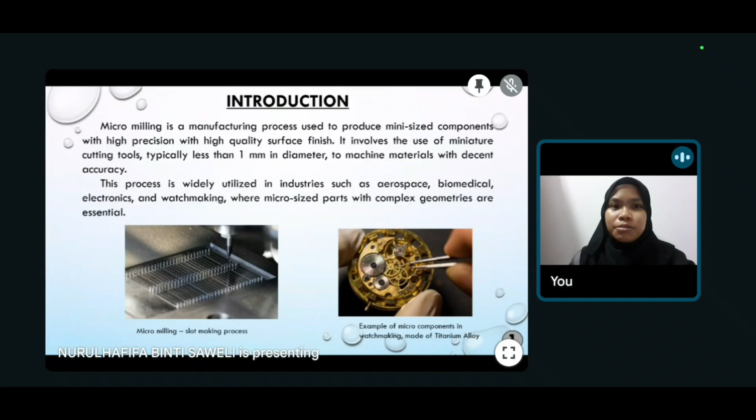The first one is the unpredictable tool life and premature tool failure are a big issues in micromilling. The second one is optimal machining strategies difficult to predict with the existence of burr formation in micromilling. The third one is micromilling cutters have different behavior compared to conventional macro tools.

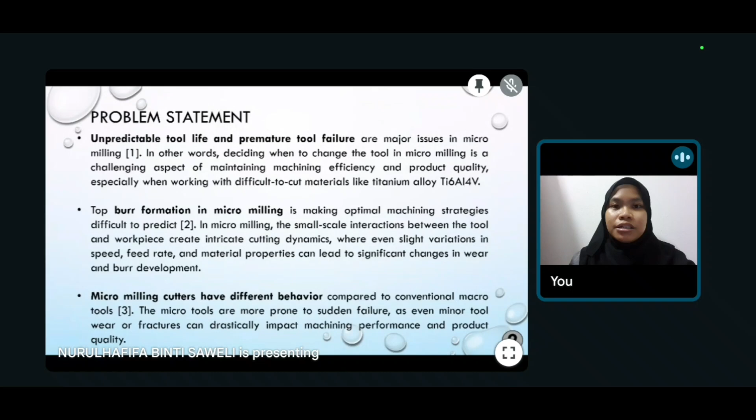Next, motivation of the project. Excessive tool wear and burr can lead to surface defects and dimensional inaccuracies. Therefore, this research is initiated to develop a prediction model based on tool wear and burr. The outcome from the developed model help to assist manufacturers in terms of scheduled tool replacement or minimizing downtime.

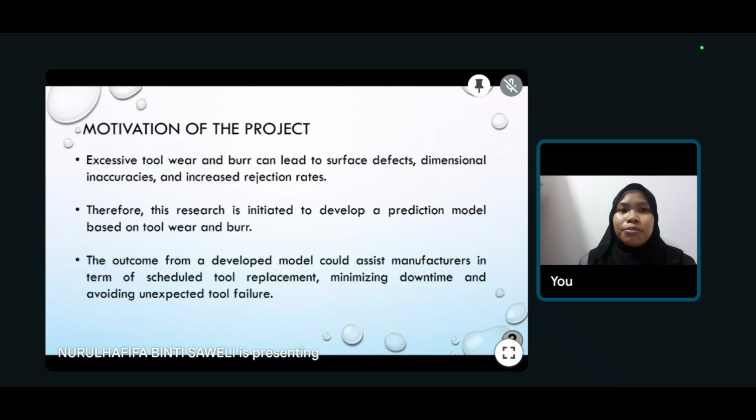The objective of this project is to investigate the tool wear state and burr formation during micromilling of titanium alloy under different cutting parameters. To develop a predictive model based on tool wear and burr response by using RSM.

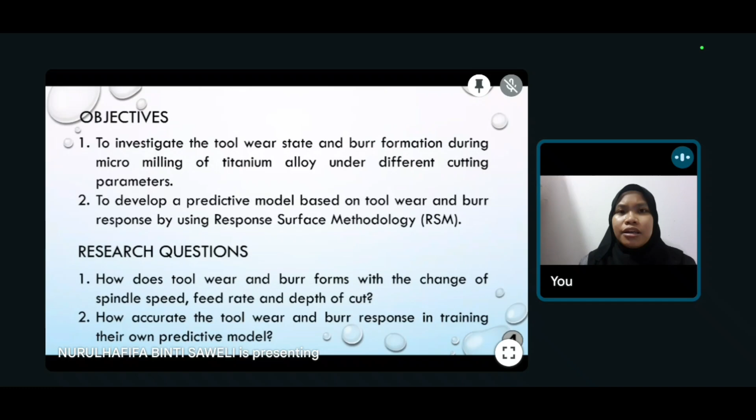After that, research question. To know how does the tool wear and burr form with the changes of spindle speed, feed rate and depth of cut. And to know how accurate the tool wear and burr response to train their own predictive model.

After several previous studies, some research gaps were found. Most of prediction models were based on single or individual signals, either for tool wear or burr formation. Since tool wear and burr are the undesired outcome, it is better to fuse the signals rather than analyzing them separately. There is still limited research on prediction of titanium alloy at a microscale level, since most of the studies found at conventional or macro scale.

There is limited research on RSM in generating predictive models based on tool wear and burr. Most of them are found to predict other responses such as surface roughness, cutting force, acoustic, and vibration.

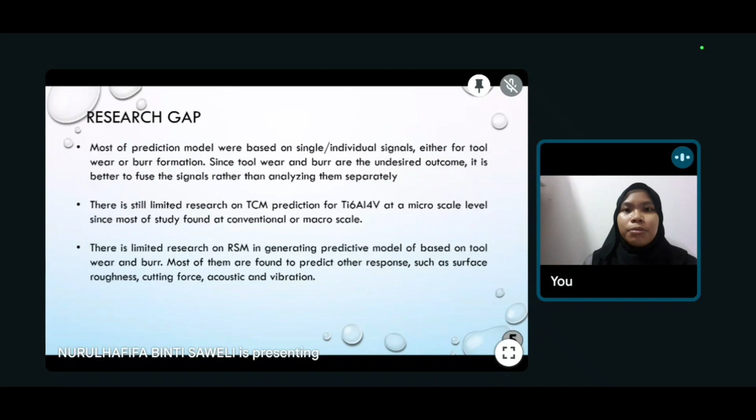For the methodology, it starts with introduction, followed by literature review. Next is design of experiment with a combination of full factorial and RSM. Next is micromilling experiment under dry condition with various spindle speed, feed rate, and depth of cut.

During the experiment, if the experiment can pass in single experiment, it will be proceeded to the next step. But if the experiment cannot pass in single experiment, it need to replace the new tool before proceeding with the next step.

After that, tool wear and burr measurement. Tool wear measurement is based on maximum flank wear, while burr measurement is based on burr width.

And then analysis and prediction model development by using ANOVA and RSM via design expert software. Lastly, the validation of the model to see the percentage accuracy of the predictive model.

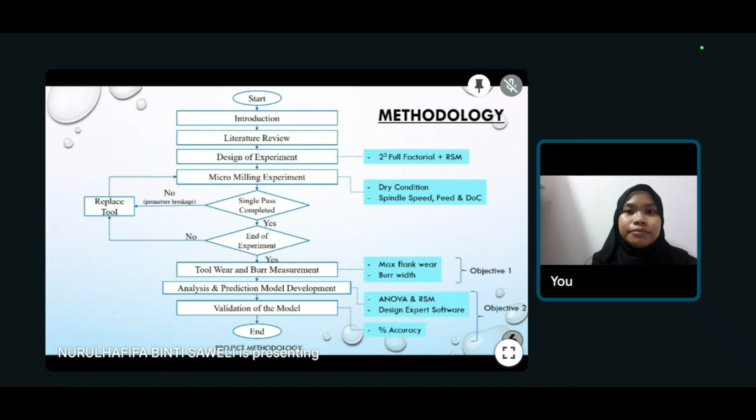The workpiece material that has been used in this experiment is titanium alloy. Cutting tool, KRIS precision with diameter of 1 mm. Machine tool of Akira Seiki 3-axis CNC machine, microscope of TM3000, scanning electron microscope SEM.

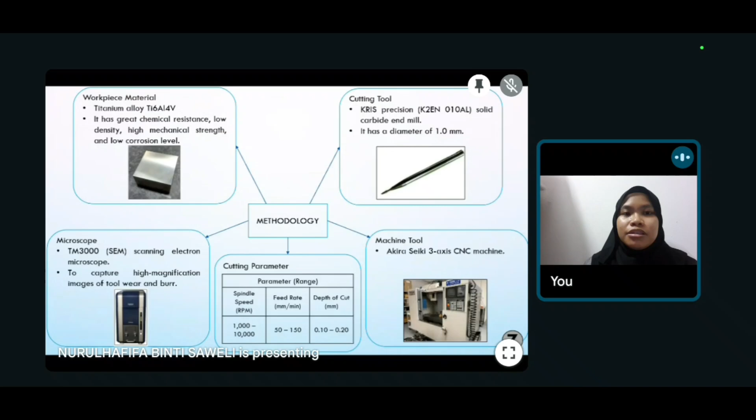The cutting parameter that has been used is in the range of 1000 to 10,000 RPM for spindle speed, 50 to 150 mm per minute for feed rate, and 0.10 to 0.20 mm for depth of cut.

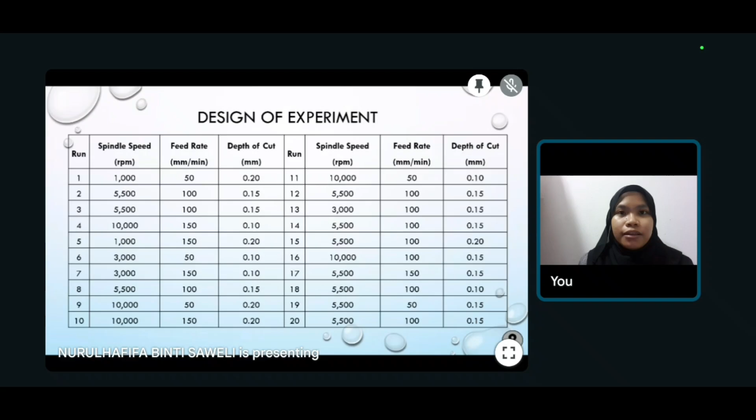For design of experiment, this table shows the result from design expert software. There are 20 experiments for this project.

Next is the result. After the 20 experiments, it is found that the least burr width is 0.092 with spindle speed of 3000 RPM, feed rate of 50 mm per minute, depth of cut of 0.10 mm.

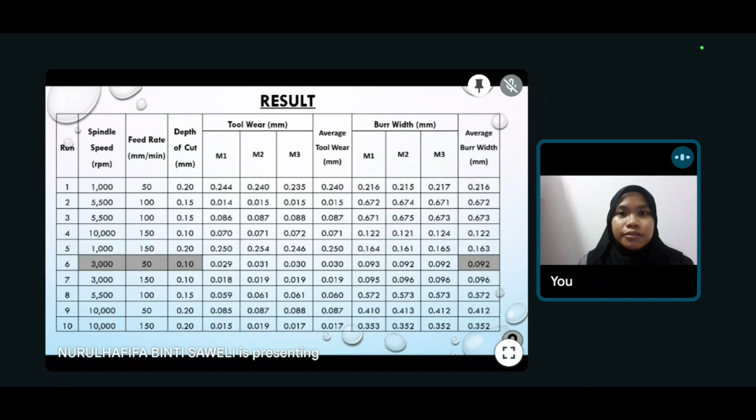Meanwhile, for tool wear, the minimum tool wear is 0.013 with spindle speed of 5500 RPM, feed rate of 100 mm per minute, and depth of cut of 0.20 mm.

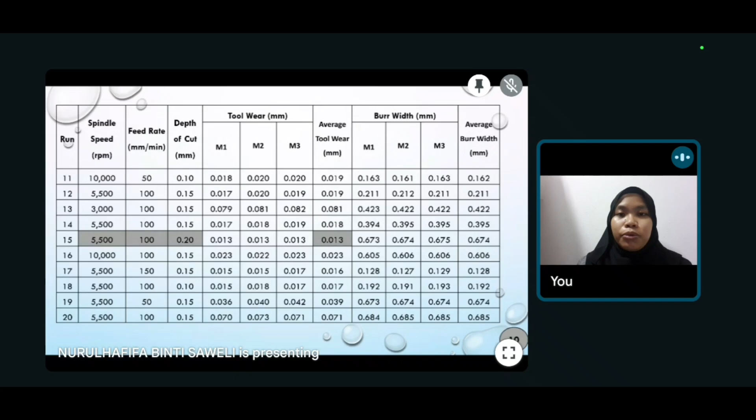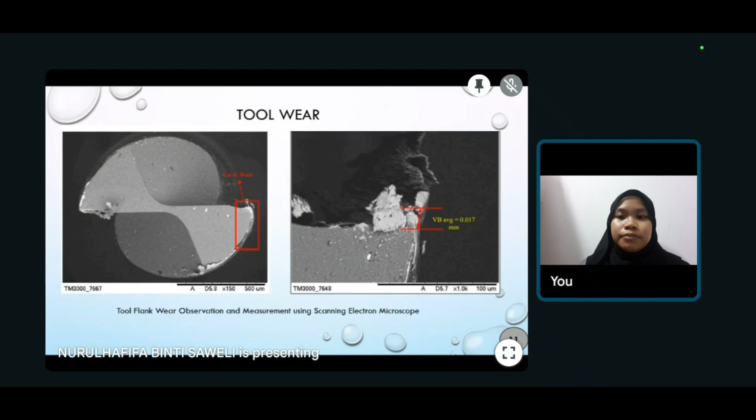This picture shows tool flank wear observation and measurement using scanning electron microscope. This is tool wear contour plot, the smallest predicted tool wear at constant feed rate of 0.0287 mm.

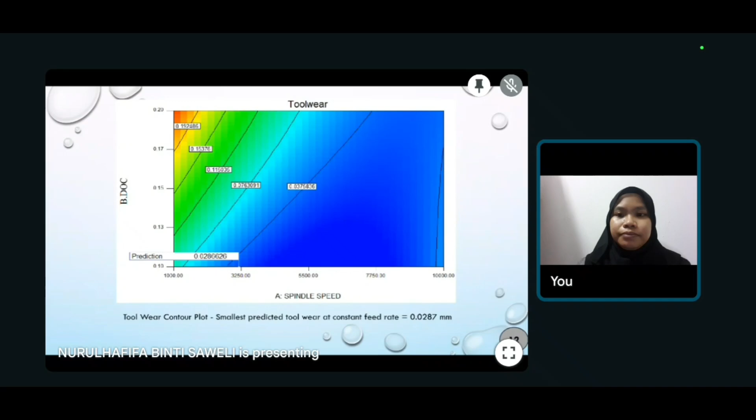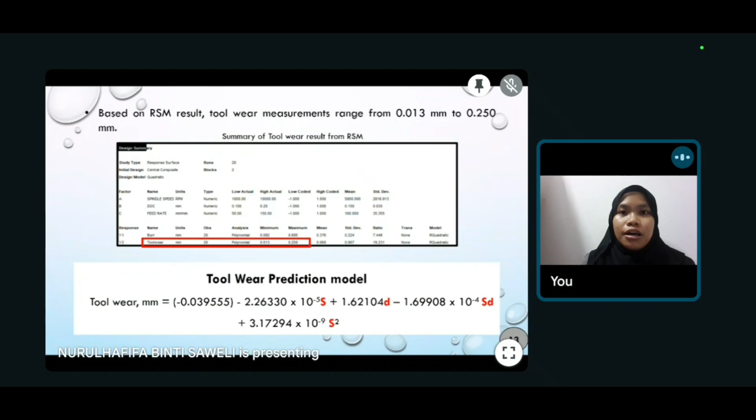Based on RSM results, tool wear measurement range from 0.013 mm to 0.250 mm. This is the tool wear prediction model after using the design expert software.

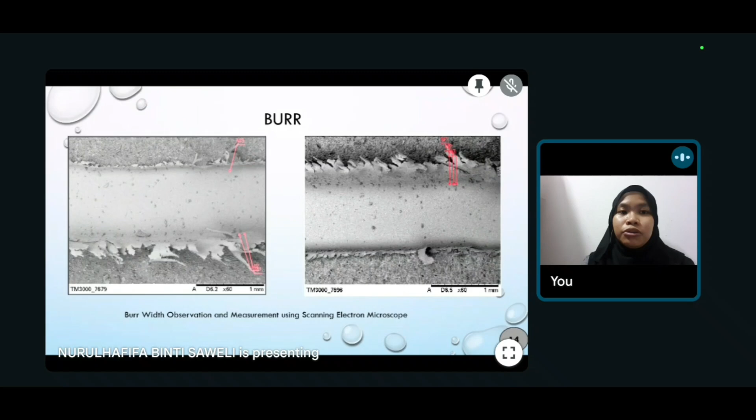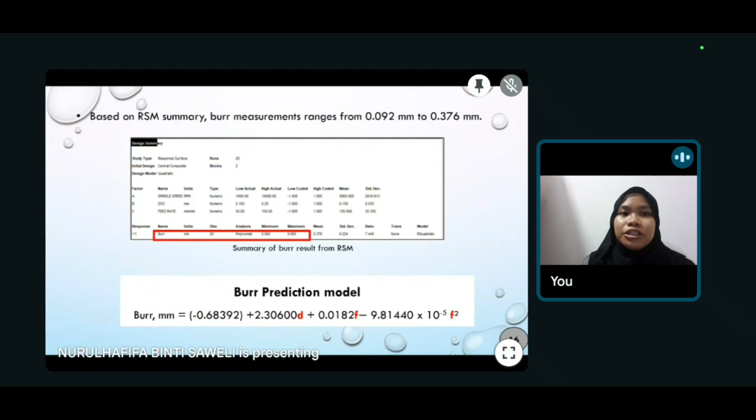For conclusion, by employing RSM and ANOVA through design expert software, a predictive model is developed to optimize machining conditions, minimize tool wear, and burr width.

For tool wear, spindle speed of 5500 RPM, feed rate of 100 mm per minute, and depth of cut of 0.20 mm resulted in the least flank wear of 0.013 mm. A balanced combination of cutting speed, feed rate, and depth of cut helped to reduce tool wear.

For burr formation, spindle speed of 3000 RPM, feed rate of 50 mm per minute, and depth of cut of 0.10 mm resulted in the least burr width of 0.092 mm. Lower spindle speed, reduced feed rate, and shallow depth of cut contributed to minimizing burr formation.